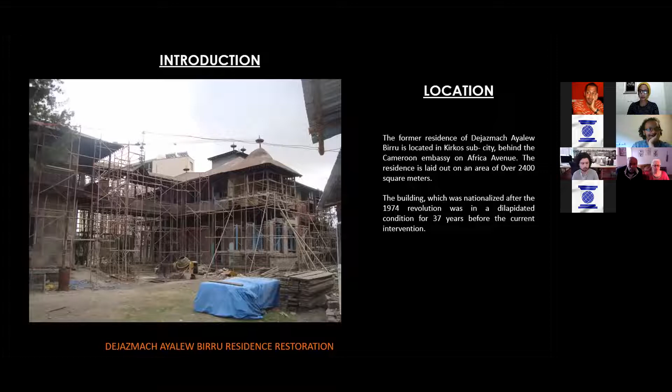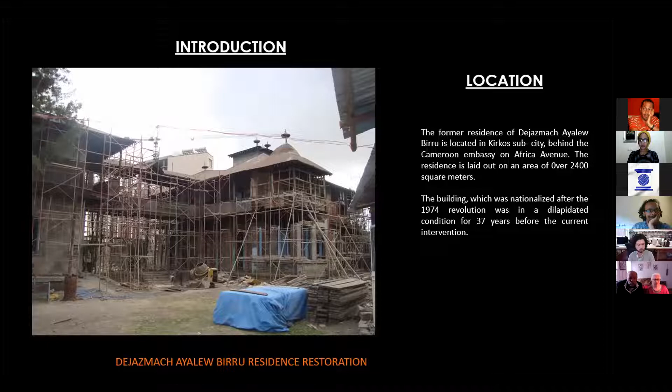So this picture shows the moment we started erecting scaffolding to carefully begin the renovation work. This house is about 100 years old and had been abandoned. It was in a very dilapidated condition, and the whole idea of this project was to restore it to its former age. That required a lot of structural intervention, because most of the elements, except the main ground floor which was built from masonry, were intact, but the rest of the building on the upper floors, including the roof, balconies, and bridge, had to be carefully dismantled and reconstructed.

So the project had this program, and while maintaining its external image, the internal part had to be completely changed to cater for a new service. The developers wanted to use this as a guest house. Mind you, as caretakers, they are not allowed to use this as their own residence, because this is in a way a property of the city or government, a heritage site. So they had to convert it into something that gave service to the general public. The idea was to convert it into a guest house. With this understanding, we went into the project.

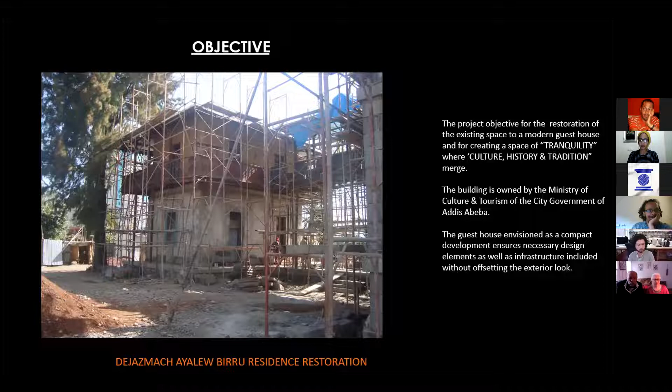The project team also included different members. We, as BIGAR, were the project managers, the main team overseeing the entire activity. In terms of architectural design, there was an architecture firm on board which developed certain preliminary designs on how to convert the house into a guest house. The interior designer's services were procured by the clients themselves - a firm called Gussen and Gossen from Switzerland was on board. Structural and MEP was fully our jurisdiction, all designed by BIGAR, and the contractor was, as I said earlier, Varnero.

So this project started in 2012, the construction of it, and I'm going to take you through some of the processes, what we went through, what we actually did. Some of the earliest images show how the windows looked, and some of the balconies were really in bad condition. When we started dismantling them, we found the majority of the building structure is built from wood, but very strong wood. They used the traditional 'ted', that's in Amharic - it's a version of pine wood, very strong, and that's why it stood the test of time.

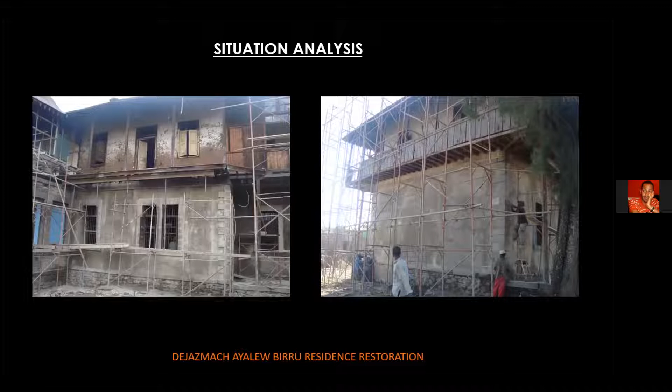But when we started dismantling the columns around verandas, walkways and other elements, you can carefully see the test of time had its bearing on this structure. It was really in bad condition. On the ground floor, the building had a collection of different finished materials - some in cement plaster, some in mortar, some in different colors and so on. To restore it to the original condition, a careful dismantling, peeling away of all these unnecessary elements was the first point of exercise. And of course, we had to be very careful not to structurally damage the building, and a full structural assessment was done before our intervention.

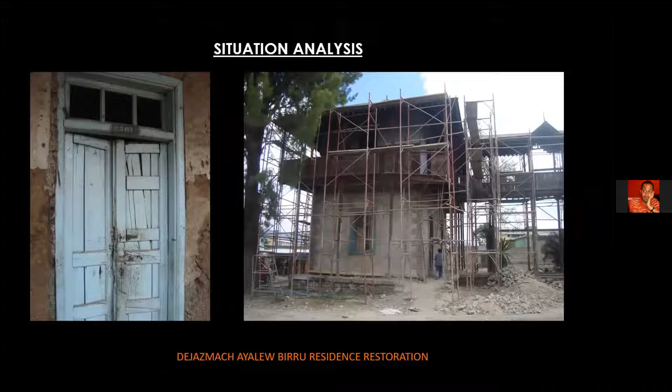Like the doors and windows, we had to label each and every item carefully, so that the most damaged elements of the building could be reproduced in a wooden workshop. We were fortunate enough to use the extensive experience of Varnero, their wood workshop, and their craftspeople, which really helped us along the way. So the first order of business, we started working on both the interior and the exterior. The strategy we adopted was going from the top down - careful dismantling of the roof, amendment of the truss, careful replacement of these elements with equivalent material, and going down all the way to the bottom.

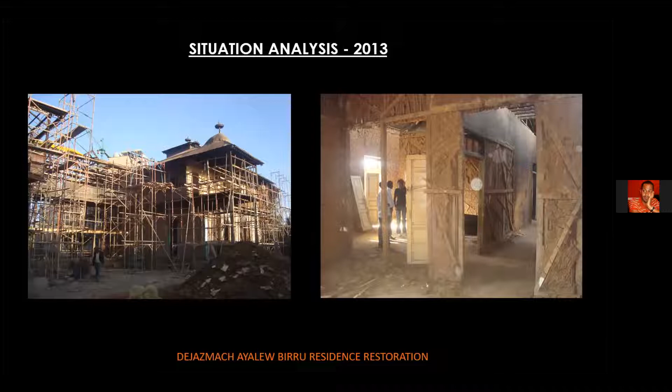So that's what you can see. We took down the roof on the top, and after cleaning, polishing, and preserving the structural truss elements that were strong enough, we had to redo the roof.

We kept as much of the original elements as possible. If these elements were structurally damaged or in a severe condition, we had to change them with equivalent or equivalent stronger wooden materials, all properly polished and prepared as to the requirements of the structural engineers.

On the interior side as well, we tried to preserve as many of the elements that were in good condition. A peculiarity of this project is that the upper floors are all built in a wooden structure, which were enveloped by mud plastering.

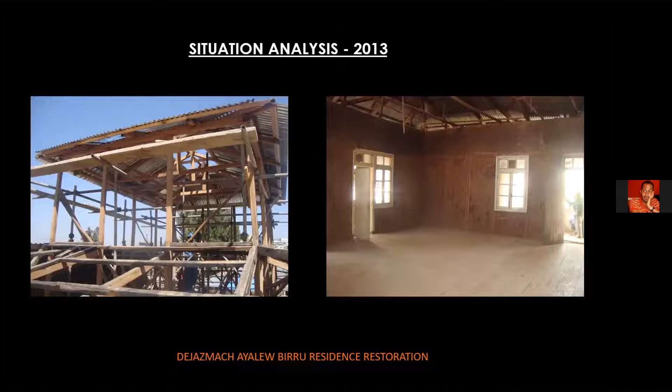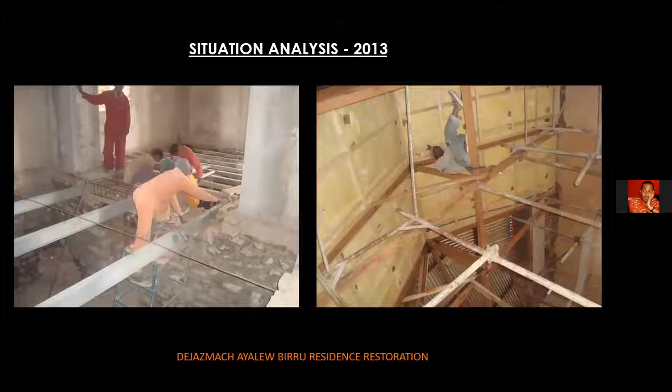The entire plastering of the wall was in mud, with a lime mortar applied as an exterior finish. The lower levels are all well-built stone masonry, with plastering done in lime mortar. An interesting aspect is that it had a basement floor, all intact but a little damaged, with water encroaching and a lot of dampness around it.

Part of the engineering intervention was carefully digging around the foundations of the building all around the perimeter and introducing a French drain for water drainage, so the water could be diverted before it encroached on the peripheries of the building.

Simultaneously, we had to carefully do a re-pointing sealing exercise of all the stone joints through cement mortar and cementitious waterproofing chemical. It was all technically done in a very careful manner.

Since some elements were damaged severely, we had to introduce structural section beams that can withstand the floor load, anticipating the future function of this building as a guest house for a collection of people. We were also finishing up the roof structure.

Originally, most of the roof truss was covered by a ceiling, but we had to expose as much of it as possible so that it adds to the architectural delight.

What you see on the right-hand side is after doing the corrugated sheet roofing, we had to do a bit of insulation on top. Doing the roofing, we had to do insulation so that from weathering, sound, and other aspects, the building is a bit more comfortable. All of this will be covered with plaster boards.

So going into 2014, you can see certain elements of the exterior, the wooden columns and others, were carefully being replaced. We prepared them in the workshop, tested very well and graded what we required.

So we had to produce all of this and bring them to site, carefully installing them on the lower levels, and simultaneously proceeding with the floor, the veranda on the upper floor, and then of course the columns following up on this.

On the interior, we carefully introduced wooden beams at areas needing structural strengthening, because this intervention also required strengthening of structural elements. Whatever was damaged had to be replaced, re-strengthened, and also catered for the services of the new function.

On the interior side, you can see most of the walls are in mud plaster, with lime conveniently applied after that.

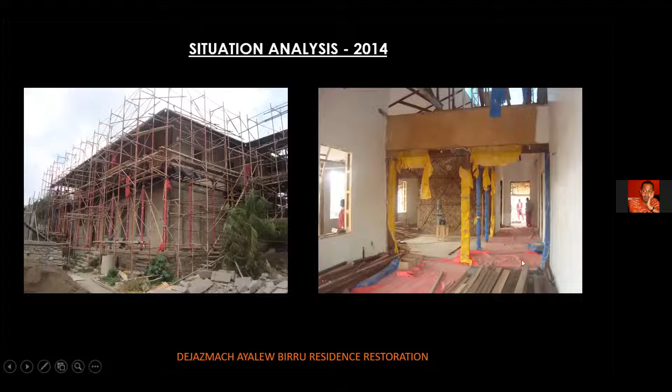Proceeding to the interior spaces, the corridors and verandas came next with the floorboard, balconies all done, and the columns also erected. On the interior spaces, the windows were a bit tricky.

When you work with a building built from mud, irregularity is an aspect we wanted to preserve. We didn't want to fashion it too much towards regularity, but to not affect the production of windows, we had to introduce wooden counterframes all around windows, label them carefully so the windows were properly produced, and when they came to site, they fit exactly where we wanted them to. This was a very careful exercise that we did with the contractor.

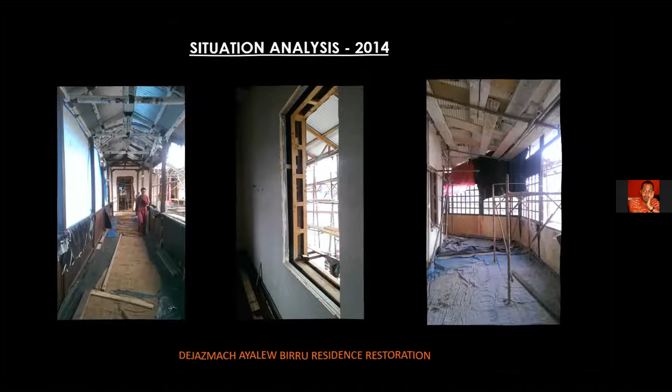Just one more thing on the previous slide, you can see in certain sections of the building where the roof truss was severely damaged, we had to dismantle, re-erect, and rebuild it so it connects with the structural integrity. Our structural engineer really helped with good direction and guidance all through the steps. This project wasn't only done in the office, it was mostly done on site, with a lot of workshop drawings, detailed drawings, and situation analysis going hand in hand with the contractor's team.

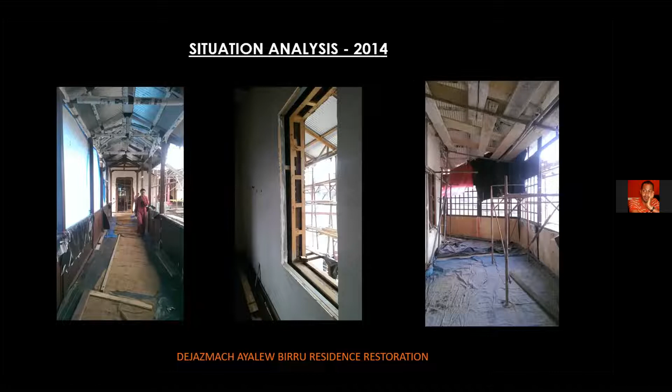On the inside, certain areas where structural wooden elements were introduced, some were strengthened, and the ceiling was pushed all the way along following the profile of the roof so you get enough headroom, and the play of these structural elements also adds to the architectural delight. An interesting aspect of one area was when we peeled off the layer to replaster it, we were intrigued by the interesting shape of some structural elements that were behind the mud wall.

So we exposed a section of it, and we preserved the mud from falling, but did it in such a manner that we exposed the layer of the building, showing what was there.

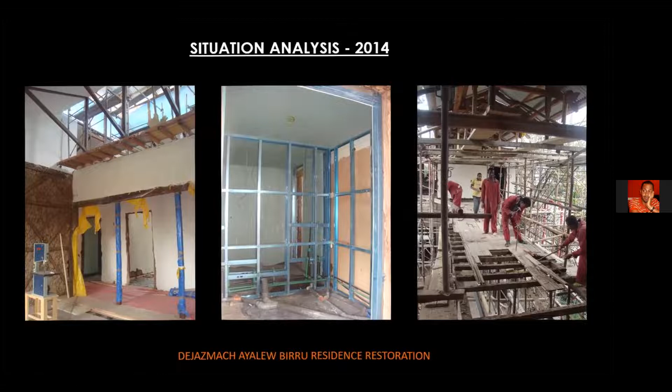Going further, here you can see the middle bridge, which was dismantled at the beginning, had been re-erected. A very interesting thing is, if you look at the image on the left side, we had to take down this element in the middle of the picture.

It's like a veranda, a space that was used as a room, but we converted it into a veranda, a sitting space. We had taken down each stone step by step, labeled it, polished and cleaned it, and rebuilt it again exactly like it was. We had to take it down, properly anchor it with the ground, and rebuild it from ground up, so there was a bit of a structural challenge originally because of certain defects we found in the foundation.

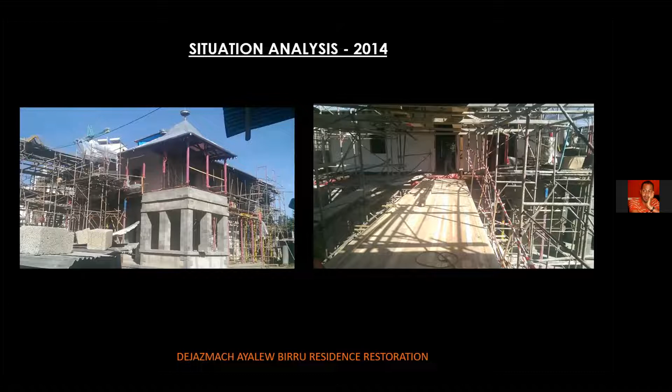This is one of our favorite spaces in this house. If you looked at the original images, this was all covered in corrugated sheet, it was an abandoned space. But most of these things that were built during the 1900s had this typical clerestory lights in some of them, where light comes in through the top section, and they played very well with colored glass windows.

So we also created a system where we brought in this gallery of light into the interior, and all of this goes right on the corridor leading into the sitting room of the first floor. The brilliant play of light, especially in the afternoon, is a delight to look at.

All of the truss that you see was original, it was there 100 years ago. We just took away the corrugated sheet, replaced it, and polished all of the wood. Some of it is a bit irregular, it looks a bit organic, but this was the original truss. We just preserved it, polished it, varnished it, and used oil for marine wood and so on to strengthen it and keep its color. When you look at it, it's pretty much what was there, but this time it's exposed to add architectural delight.

Going into 2015, the building slowly starts taking shape. Imagine 2012 to 2015, three years of careful exercise. Everything had to be done carefully: dismantled, re-erected, and put back to resemble its original condition. If you look at the image on the left, the villa with the glass gallery, it was not in that condition. It was completely destroyed when we started our original restoration. We had to redo it in a similar manner but with much better quality of wood and construction, so it can withstand another 100 years.

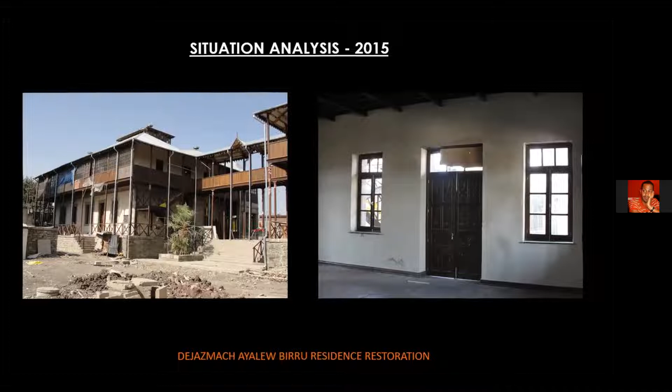Working in the landscape and on the building interior, most was finished - the doors and windows were fit, and the building was coming up, taking shape.

The downpipes were in place, all put in corrugated sheet, but we also tried to play a little bit with it - this building is very controlled from a design point of view, with only certain elements, but we created a landscape that could complement it. The whole area where this building rests is over 2,400 square meters, just about in the middle of the property, which allowed us to play with a lot of landscaping around it.

Interior spaces taking shape - the doors all fit in, and glass everywhere allowed a little transparency. That area was going to be fashioned into a sitting corner for coffee ceremony, and others were taking shape as well.

On the side, we put insulation on the roofing structure for heat and sound. On the corridors, we just painted the corrugated sheet in white color. The contrast with the dark brown wood was excellent - the wood is always amplified, coming out as the main element of the architecture.

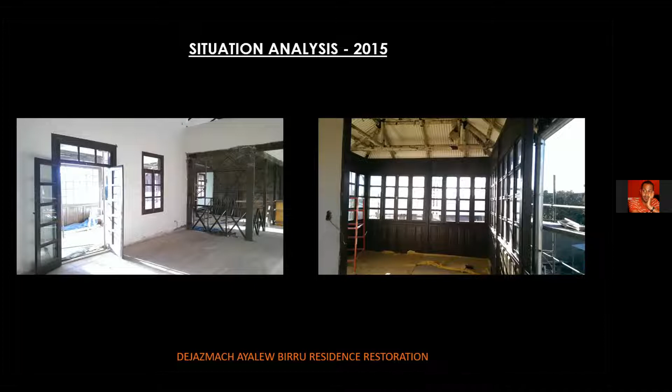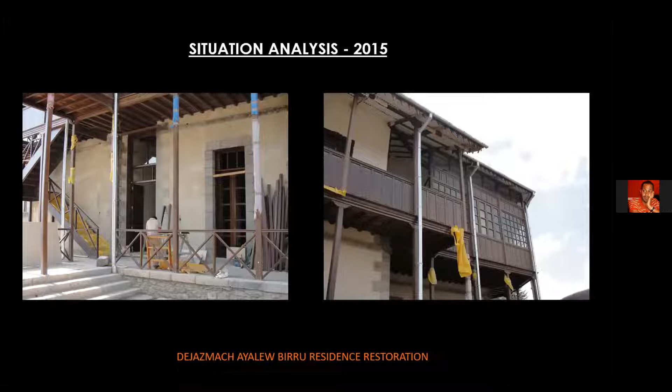The wood and craftsmanship were really a beauty, a delight in this building - the perfection, the execution. We produced all the detailing, all the specifications, right down to the type of member to be used. We are really grateful to the team of Varnero, without whom this project would never have been achieved.

Building taking shape, most of the wooden elements on the outside varnished. It was a continuous journey of rectification, because some of the columns we delivered had a little warp in them - this was seasoned wood that had to be prepared in the workshop, dried, and then delivered to site. Over this 3-4 year journey, through winter and summer seasons, some of them changed character. They had to be carefully dismantled again and reintroduced. It was a very interesting journey.

This was like a live project, not something you just finish and close. You had to work, check, and deal with elements which, from our experience, we had to learn a lot about from the site and the nature of the materials. It was an interesting experience.

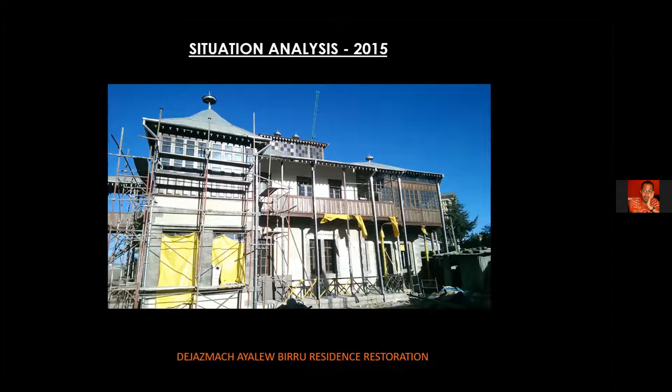Building taking shape, we were coming out into the landscape, designing the footpath, the green areas, and the type of vegetation. One thing I failed to mention - landscape architecture was also handled by BIGAR. We have a landscape architect who works with us, and we worked with her on the selection of plant species and the type of garden.

The owners were very much involved throughout this process - had they not been patrons of the arts that they were, we could never have achieved this. They were very much involved, careful about the selection of material and the ambience they required from the building. We also had visits from the Ministry of Culture and Tourism, who made sure that the restoration and exterior look of the building were preserved to its intended target.

Most of the wood elements in the lime plaster are taking shape now, paving the way for the fitting of the interior doors, some interior elements, and the lighting. The interior lighting, furniture and everything were carefully selected by the interior designer through continuous dialogue with our team. It's also an interesting journey.

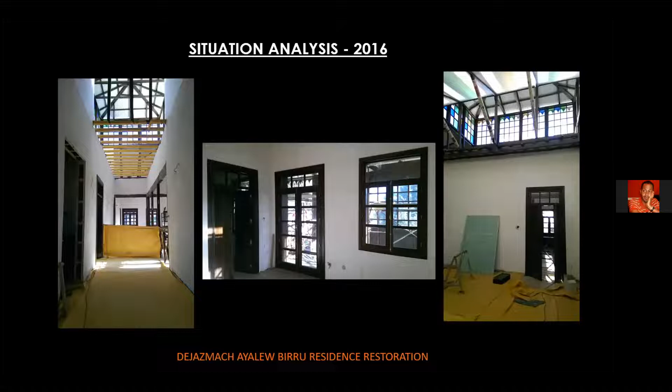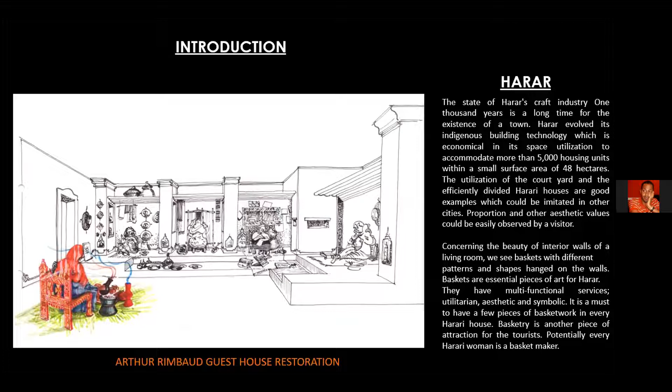What you see on this picture is the Rimbaud house, the main building of the Arthur Rimbaud Museum in Jugol. This journey started back in the early 1970s, when the then French President Pompidou and our Emperor Haile Selassie, who had also lived briefly as a young man in the city of Harar and carries that cultural influence as part of his legacy, began a conversation about creating a place as a remembrance for Arthur Rimbaud in Harar and in France. So part of it was the creation of this museum.

It's a two-story building. At the lower levels you have the library with an astonishing collection of books on Arthur Rimbaud, while on the upper part you have a magnificent gallery with a collection of his sketches, pictures, and poetry. It's quite phenomenal poetry.

There's one poem I'd like to recommend to everyone on this occasion. It's French, called Le Bateau Ivre. I'll type it in the chat section later. You really have to read that poem to see the magnitude and capacity behind Arthur Rimbaud.

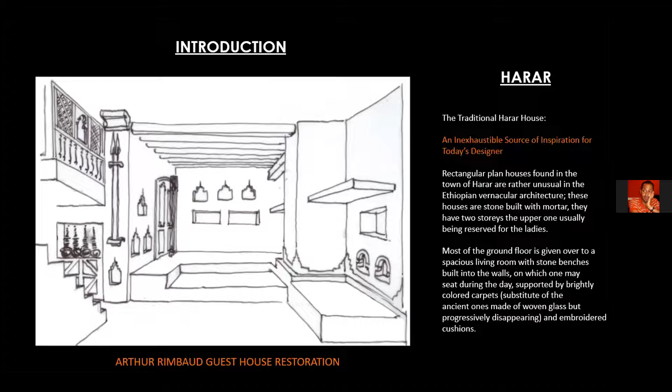Apart from the special relationship Rimbaud had with Harar, the other thing was a closer study of the architecture of the Harari house. It's unique in terms of its space organization and clever arrangement of spaces. In a very small space, Harari tradition allows you to use different niches, corners, and enclaves to store different elements of the household. These elements create a unique architecture, and the spatial arrangement was one thing we took as inspiration and followed closely.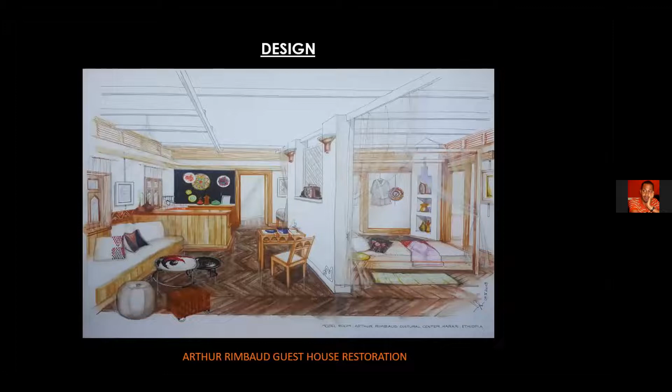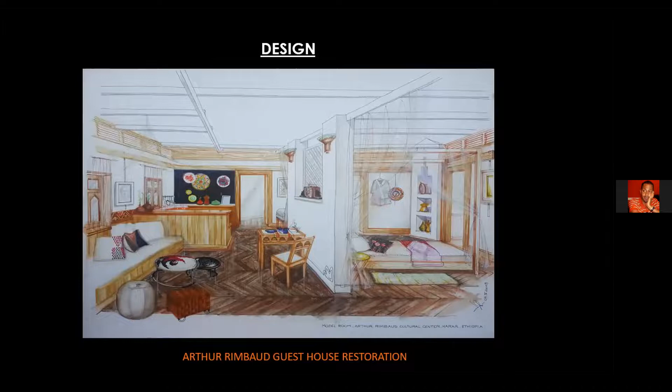And voila, this was the inspiration to the journey. We said, this is how this guest house has to look like - an inspirational design sketch prepared by Jacques Dubois. No matter which kind of rendering software you use - architects in this audience are listening to me - no matter what you do, if you abandon the hand sketch, you can never get this originality. Such vigor, such life, such inspiration can never be replicated with computer software. So when Jacques made this sketch, after several discussions, we just said, wow, this is what we have to achieve.

What does it take to achieve it? Physical assessment, spatial ergonomics, techniques, different elements, functionality, safety - other standards have to be met. So elements of architecture and engineering started encroaching into shaping, but all respecting this original vision. At the end of the slide, you'll tell me how much we have achieved, how close we have come to this image.

So a technical drawing had to be produced, and we had to get a guest house with a sitting room and sleeping quarters delineated, but not strictly. There had to be movement all around. It's quite a small space, and then we had to carefully select an area where to put the bathrooms.

There were acute angles, sharp corners, so we cleverly played around with the positioning of the hand wash basins and bathroom areas, which conveniently fit in those spaces. On the right-hand side, part of this house was built in masonry, which allowed for damp proofing and pipe lines to run within the interior.

This is a guest house, so you have bed sheets and different elements that have to be continuously washed and dried. So there's a space for washing, drying, water storage, generator, electrical distribution board - control and maintenance, anything can happen in the lower level, which is pretty much a functional space, while the upper levels are a fully functioning guest house.

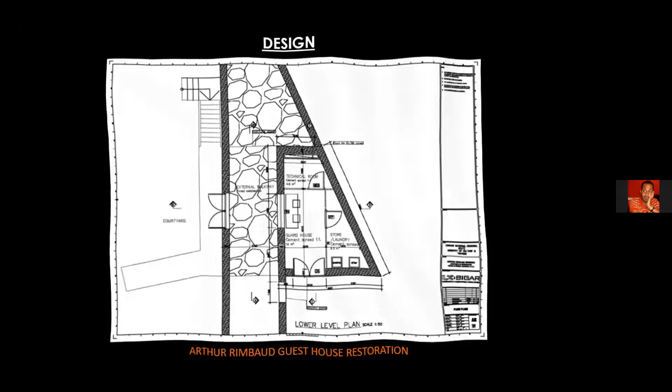And of course, communication was done not only through drawings - when you look at the earlier pictures, this is very strictly regulated technical drawings, specifying each dimension, material, very well coordinated for purposes of technical efficiency.

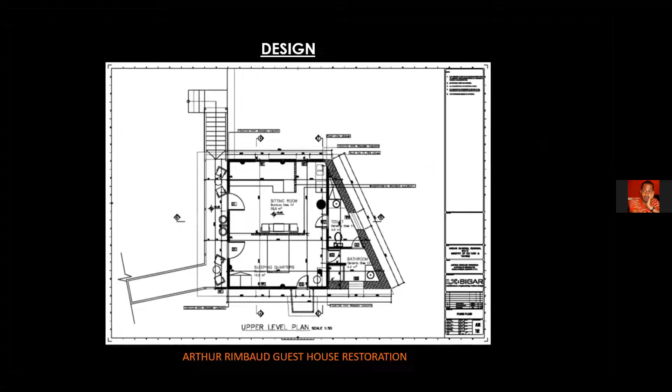At the same time, we never left the architectural beauty that can only be enjoyed through sketches, where we provided description of the different elements of the architecture, the floor type and material, the elements of the wooden cladding, some of the niches where they had to be introduced, the wooden architrave and wooden skirting going all around the building, ceramic tiles where we wanted them to be positioned.

We appreciated and capitalized on the uniqueness of the hand sketch, which elaborated and also very well narrated what we wanted to convey as a message to the contractor.

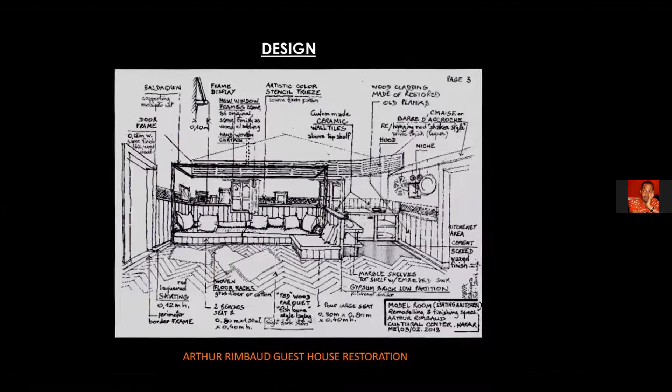So we started the journey, and like I said, we stripped down everything to the bare minimum, and the most important structural elements were left in place, while the cladding and other elements had to be stripped down. The wall had to be peeled away to understand what was behind. Some of it we had to preserve, some we had to carefully remove.

If you can see, we took down all the ceiling and now the roof truss is all exposed. Some of it was damaged through weathering and years of misuse, so we had to start with correction and re-strengthening, replacing all the damaged members. All the other members which were not damaged and which were suitable to the architectural exercise had to be exposed.

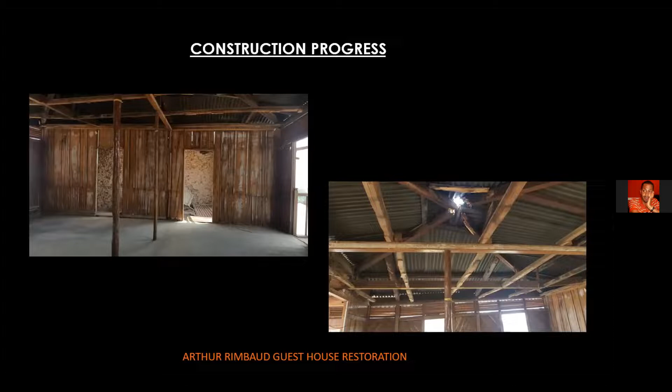So the first part of the exercise was we had to lay the ceiling along the angle or the slope of the corrugated sheet, so that it gives you much headroom, and careful structural renovation of re-strengthening and replacing of elements happened.

The whole project, by the way, was a one-year exercise. We had a project period of 9 months, but then we extended it by 3 more months for certain elements to be polished.

So, as-built measurements - what is the situation on site? We had a pre-drawing based on site measurements, but once you start removing elements, you are in for a surprise. So improvisation was really part of the program.

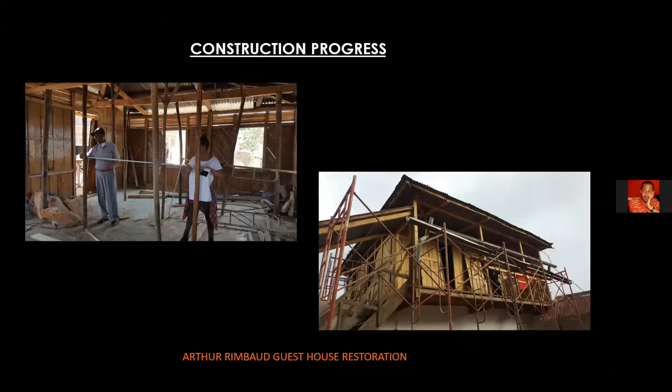We worked hand in hand with the contractor's team. It was not a matter of just delivering a drawing and walking away. Unless you work with a contractor, you can never get the job done.

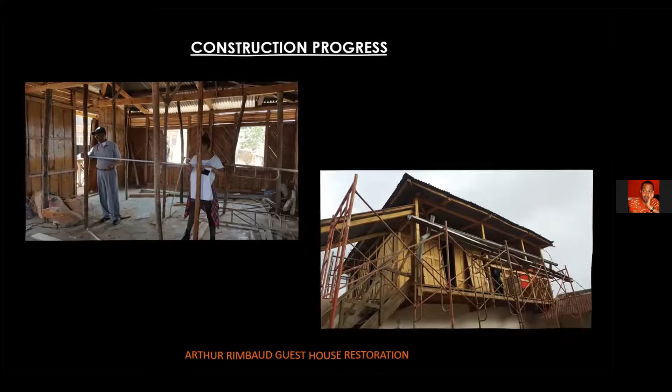So you see the strengthening of the roof truss - we introduced steel brackets. To my architect friends who were a little bit conservative about the introduction of modern materials, this is my message: the efficiency and possibilities that steel provides is phenomenal.

We can still also do this with wood, but the cost factor against efficiency, availability, and the degree to which we can manipulate are factors you have to take into consideration. A very flexible frame of mind, going for different possibilities and techniques, is very important when you're looking at a project with a very tight budget and a very tight timeline.

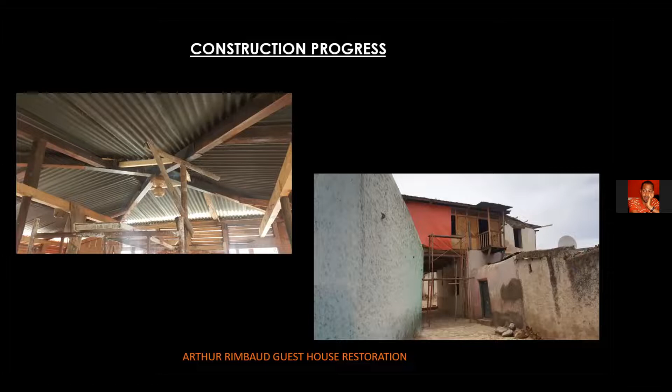Interior elements: careful replacement of wooden elements on the wooden wall, careful re-strengthening of elements that were worn out, and the replacement and amendment required step-by-step interventions.

We used cement boards, 9mm cement boards, fire retardant from 60 to 90 minutes, water repellent all around, water resistant. You can use it on the exterior, and it can last 4 or 5 years. I've used it on other projects as well. It will not wear down, and at the same time it is also impact resistant.

So materials were carefully selected for the interior conversion, while we kept the exterior pretty much intact. We introduced gypsum walls to work with this divider between the living space and the bedroom space, and we tried to improvise, taking inspiration from the Harari wall elements, but with a bit of improvisation as a space delineating medium.

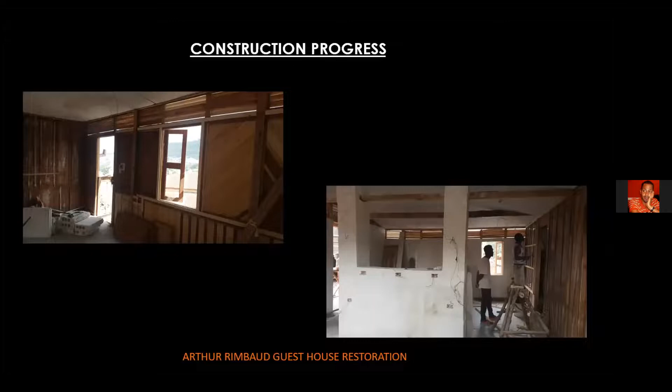So at this stage we had to put the ceiling on the interior space, the left-hand side picture. Part of the elements that we believed were interesting as part of the renovation, we exposed them, so they become part of the architecture.

The ceiling raised a bit, and the fact that we were going to plaster all of it in white color creates a bit of spatial liberty, because if you work with very dim colors in a very tight space like this one, it can feel constricted and suffocating.

Some of the elements, the suspended floor, is a unique feature of this building. You come on the streets of Jugol, this is what you see. This is the bottom of the guest house before entering the Arthur Rimbaud compound. But it's interesting when you look at it from the bottom.

So we preserved it. We put all the elements in place, applied paint, and made it more enhanced, so to speak.

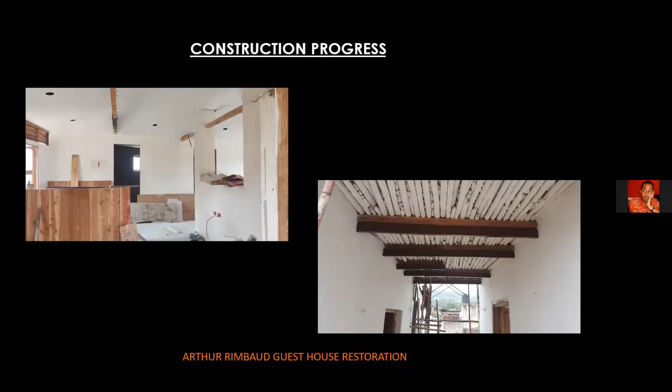So working hand in hand with the contractor's team, gypsum up in these pictures, plasterboard all in place. We also simultaneously started working on the wooden cladding on the bottom part, to give it a bit of character. We wanted to play a little bit with the wood, and it was also part of the contrast.

The bottom base is all enveloped in this wooden element, which signifies a bit of warmth, while the upper part is all done in white. We had to carefully balance the application of wood against not to overwhelm the space, but also to contrast it with the white color in the expanse that it can create.

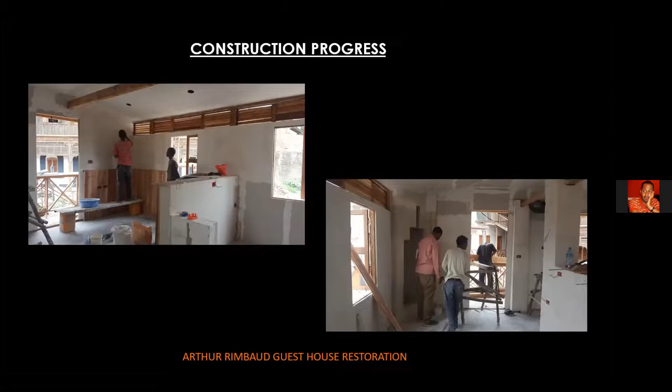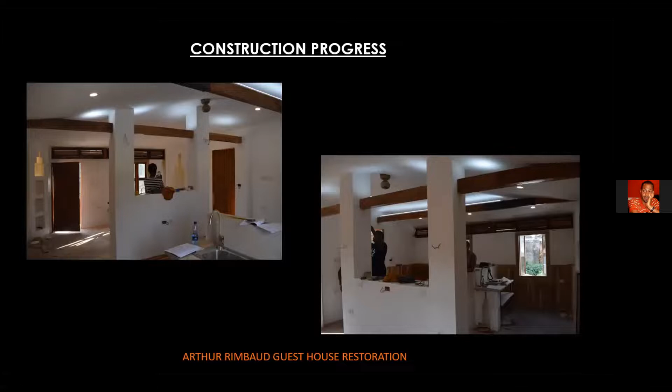So slowly taking shape, the building, wooden elements, carefully exposed part of the truss, wooden doors. We had to preserve them, polish them, varnish it, and bring it to its original state. And some of the interior space, the switches, the sockets, all white, not to really take away from the aesthetics, were all introduced.

And then we started putting the exterior lights. We don't want to put common lights like fluorescent lamps. We introduced lights carefully on the walls, concealed them behind the roof overhangs and so on, so that can also create the architectural delight.

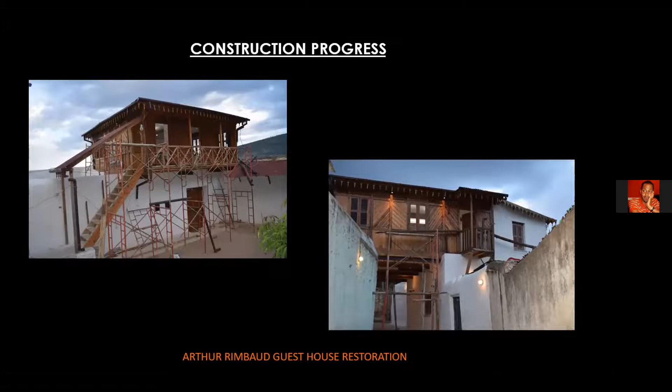The Musharabieh is a very interesting feature of the Harari house. So we introduced it, we created versions of it to delineate the space between the living area and the sleeping quarters.

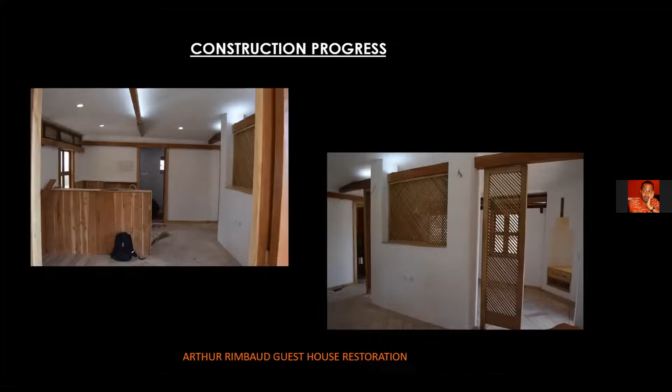The wood, properly polished, and after application of wax, we walked barefoot on this floor to check if it is properly in place, because you remember the earlier one was a cement finish, so we had to chisel a part of it, remodify it, and completely apply this wooden floor, which was a much better upgrade for the interior.

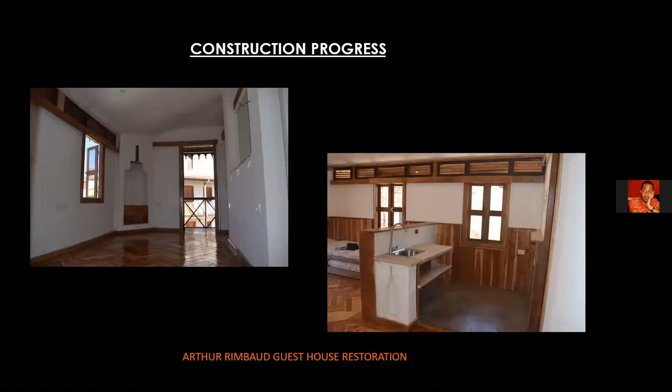The kitchenette, on the right-hand side picture, is a wet area. So underneath, we didn't compromise on technicalities, like I said, fireproofing, waterproofing, and so on. We're given a lot of attention to that. The floor under the kitchenette is a polished concrete floor, waterproofed underneath because this is a wet area, wet space to work on.

We started working in the bathrooms, so we used elements of treated pine wood, treated and varnished with special chemical to protect it from water. The hand wash basins, we had to look to the market. We extensively looked at different suppliers and places all around Addis to find these unique elements, because this is not something you just go into a shop and buy, especially in Ethiopia. It's very difficult, so we improvised as much as possible with what was available.

Just like the kitchen space, look at the floor, it's polished concrete again, but the ruggedness and the irregularity was welcomed, appreciated, and enhanced, becoming part of the architecture. We did not make it very clean, polished or neat, as that would have defeated the purpose, the irregularity of the elements bringing their own vigor to the architecture.

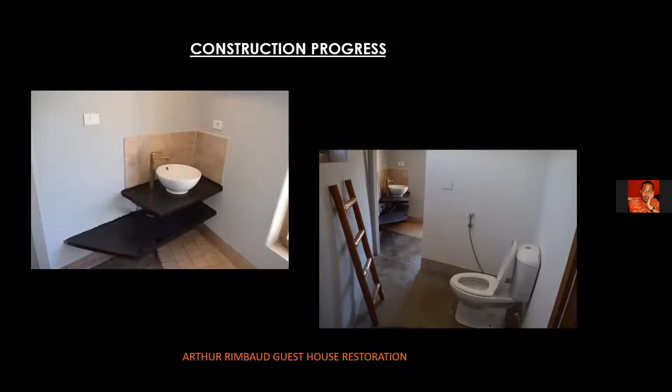We really worked on this project as a crafts project, like I said, working with an interior designer with his heart very close to the crafts, and also an artist who was hands-on working on our projects. We ourselves appreciated the crafts, the working with the hand, and the ruggedness and roughness of those elements introduced in the design. We wanted this to look organized, but not rigid — a bit interactive, a bit irregular, a bit rugged.